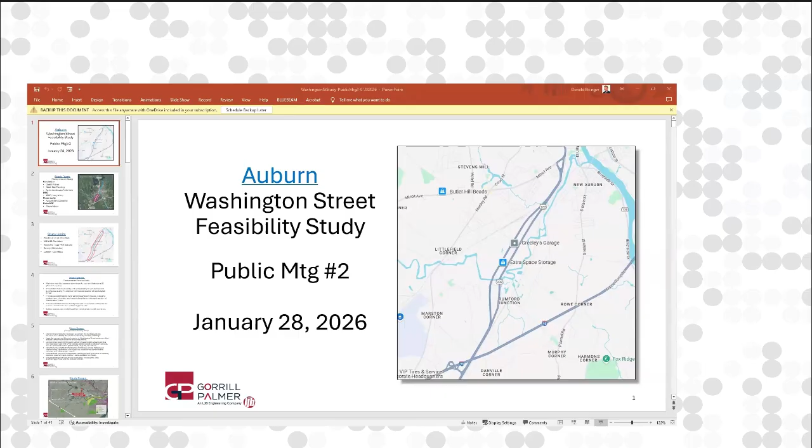See if I grab the right one. I think it's this one. Let's see what happens. All right, did I flip a page for you guys? Did you guys see it flip a page? No. I see, all right, page one. Okay, you don't see page two. Let's stop sharing. All right, let's try this again. It looked like you opened it, but maybe the slideshow didn't start. Okay, let's try this guy.

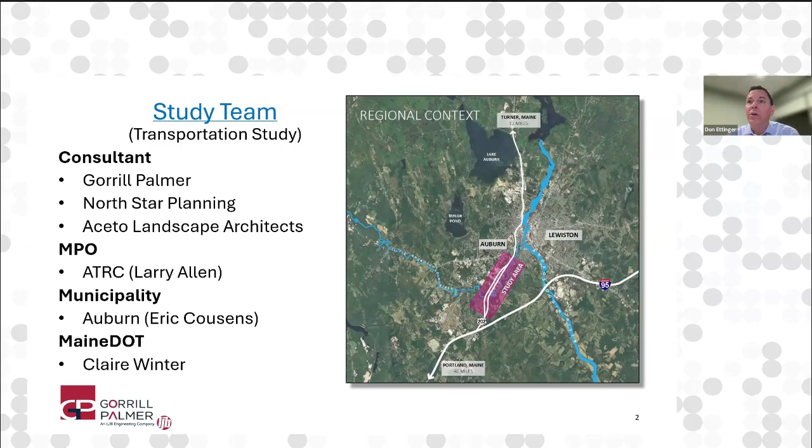All right, so first we want to discuss our study limits for this. So the graphic on the right illustrates where we are. Hopefully, Ben or Grace, can you nod your head if you see my cursor moving on the screen? Perfect, okay, thank you. So to give everybody a bearing, this is I-95, or the Maine Turnpike, here. This is exit 75 on the bottom of the graphic.

Our study begins just north of exit 75, right at Allied Road, where the park and ride is. And we continue north all the way up to the Minot Ave Rotary, where Roy's Burger is located. So we'll be continuing all the way up there. We'll be considering both the northbound and southbound barrels of Washington Street, or Route 202, through this area. And the overall length is just shy of 4 miles. So, pretty lengthy study.

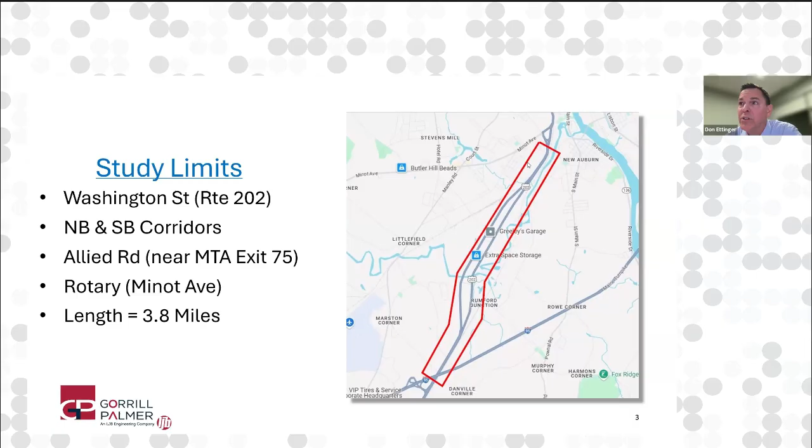What we want to do is try to provide improved safety and accessibility for properties and businesses that exist along the original northbound section of Washington Street. You'll notice driving through there, the characteristics of both the northbound and southbound barrels are drastically different. A lot of residential, industrial, and commercial businesses exist on the northbound corridor.

The southbound corridor is limited access with really no businesses along that section. Another goal of ours is to provide accommodations for all transportation modes, including bikes, pedestrians, and transit along the northbound section of Washington Street, while maintaining a limited access facility focused on vehicles and trucks on the southbound corridor. And look at safety, access, and mobility along both of those corridors.

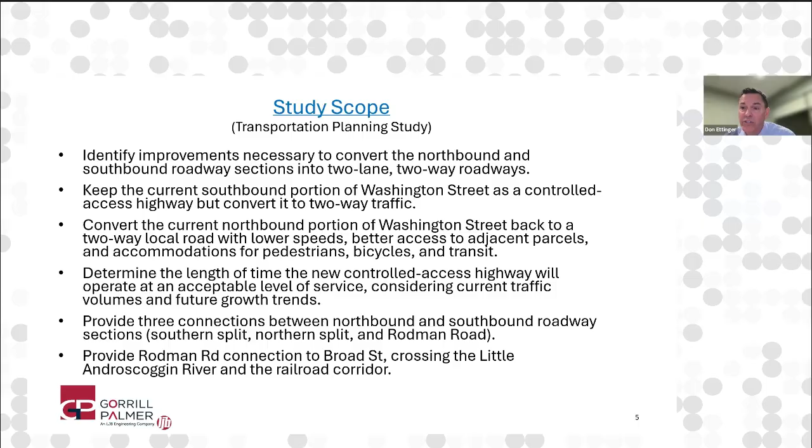I'll note on that Broad Street connection that it will require a crossing of the Little Androscoggin River, as well as an active railroad corridor in that area. So that was in narrative form what our scope is. This is more in graphical form what we're looking to do.

So in the existing condition, we have one-way traffic in the northbound direction and a separated facility for one-way traffic in the southbound direction. There is a Rodman Road connection to that southbound corridor, but not a direct connection to the northbound corridor. In the future condition, what we're looking to do is to take that northbound corridor of Washington Street and make it a local street.

Lower speeds, more accommodations for bikes and peds, make it more user-friendly for the businesses that exist along the corridor and the residential properties. And then on that southbound corridor, maintain that as our mobility corridor, but provide for two-way traffic. We maintain a connection to Rodman Road, but we'd like to introduce a new connection all the way across to Broad Street, crossing the Little Androscoggin.

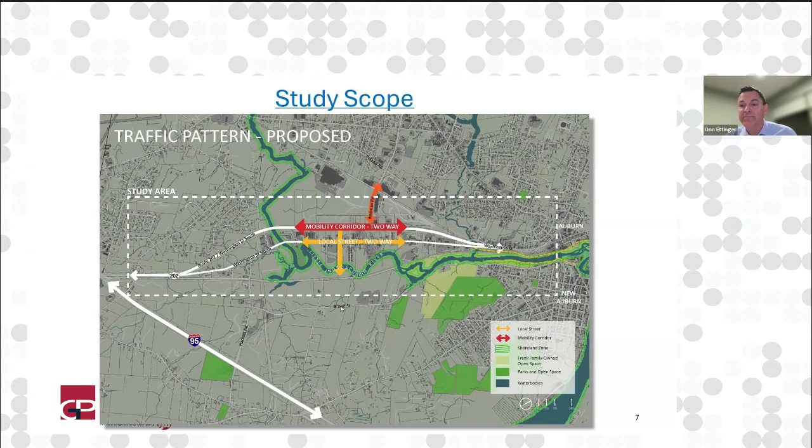Okay, so let's jump into some of the information that we gathered as we have been working on this planning study. So first thing first, roadway conditions. It's a divided highway in the existing condition. There's two lanes in each direction. It's a corridor priority 1 roadway.

DOT prioritizes roadways, I think, from 1 to 5. A 1 is the highest priority. These would be the interstate system or major arterials. Priority 5 would be a local street. So in this case here, this is a high priority corridor. It's a principal arterial. It has just shy of 20,000 cars a day, so a lot of traffic on the corridor. It has relatively high speeds through this corridor with average speed limits anywhere from 45 to 55 miles an hour.

The southbound corridor is limited access. So the photo on the bottom right here represents our southbound corridor. You'll see it's all wooded, no development exists through here. Whereas the photo on the top right shows our northbound corridor with businesses that exist along the corridor.

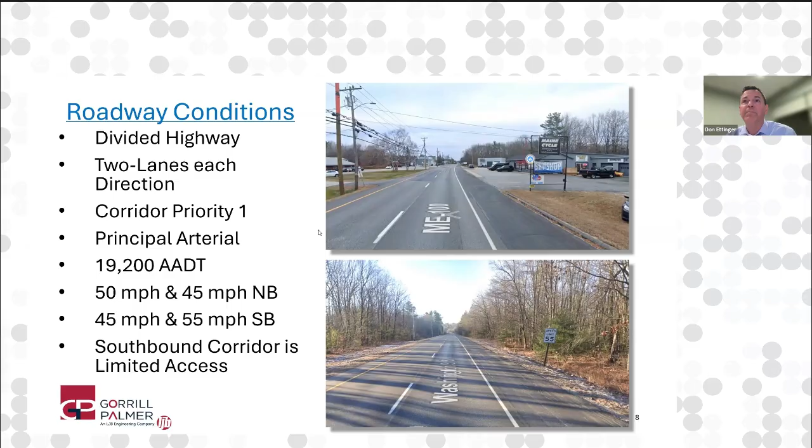All right, one aspect we like to look at in these planning studies is a safety review. Do we have any locations that are dangerous or considered high crash locations? Do we have intersections or nodes that have higher than normal crashes or accidents?

So we looked at the whole corridor, looking at high crash locations. I'll give you a definition of what high crash location means. It's having 8 or more crashes in a 3-year period and a critical rate factor of 1.0 or greater.

What is the critical rate factor? The best way I describe it is it compares the severity and types of crashes at this location to other intersections throughout the state, and then ranks them. So if it's 1.0 or higher, that will also be a trip category that needs to be met to be considered a high crash location.

So we have one location within the corridor that's a high crash location, for years 2021 through 2023, that's our 3-year period. It's the Washington Street intersection with Beech Hill and Danville Corner Road. 17 crashes in that 3-year period with a critical rate factor of 2.79.

So this intersection, there is mitigation ongoing. A traffic signal is planned and in design as we speak. So the graphics, when we present our concepts to you, will show a signalized intersection at this location.

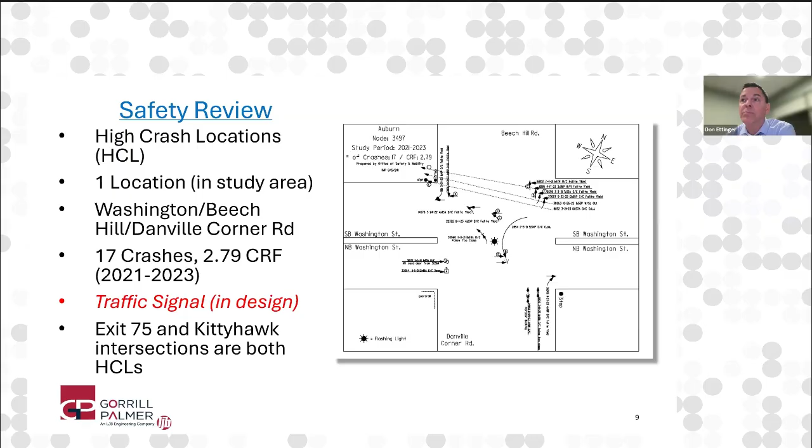They set their camera out at 5 different locations along this corridor and collected a ton of traffic data for every vehicle that crossed through this area. What we found, generally speaking, is speed of traffic is higher than the posted speed throughout the corridor. Some of it's quite a bit higher, but generally speaking, speed limits are 45 to 50 to 55, and we're finding speeds in excess of that on average for daily traffic.

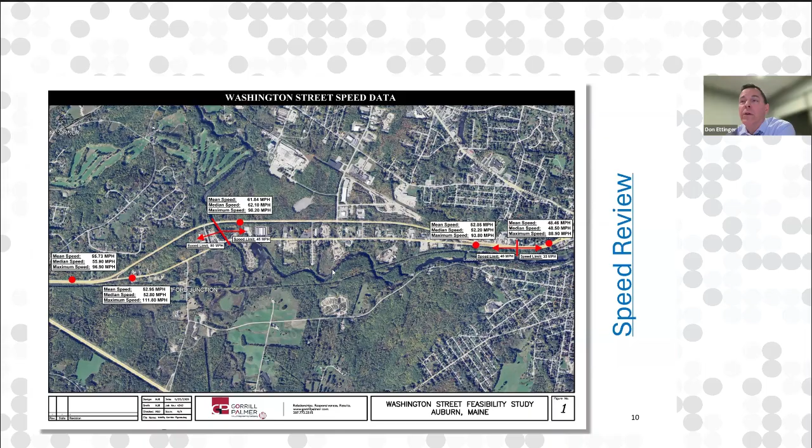All right, so we're going to transition. We talked a little bit about safety, and we're transitioning into traffic as it relates to safety. I'll start with the graphic on the right here and share with you again. We've rotated a little bit, so this is north-south for Washington Street.

So this is our Washington Street corridor. City proper for Auburn is on the top of the graphic. Maine Turnpike exit 75 is on the bottom graphic. So we have some circles here in colors, and I wanted to explain what those are.

The first one, the red circle, is the signalized intersection with exit 75, just slightly outside our study limits. The green circle you see here is the proposed signalized intersection with Danville Corner Road and Beach Hill. And then we have 3 pink circles.

This represents the 3 locations where we're providing connections between our 2 Washington Street corridors, the local street and this mobility corridor. So we call the bottom pink circle our southern split. The top one would be our northern split, or where they merge back together. And then in the middle is right at Rodman Road, where we have that connection today.

So through this area, one thing we wanted to focus in on is that mobility corridor. We wanted to understand levels of service and capacity based on different options and footprints. The other thing we wanted to determine was travel time.

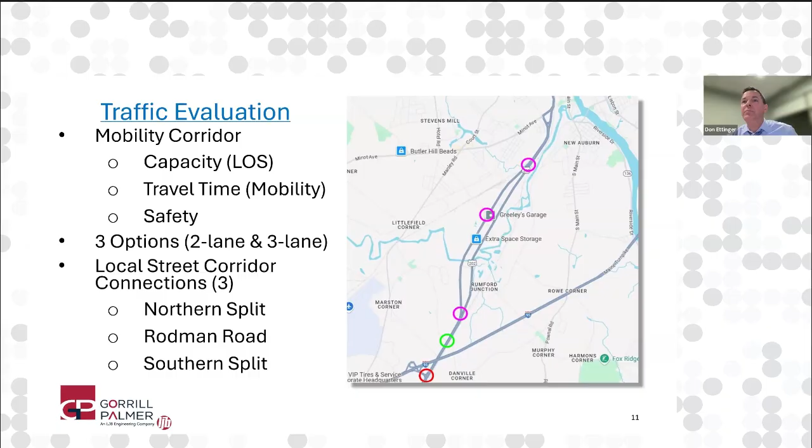So we'll jump to the results of our traffic analysis and modeling. As I've described each option, what we found was pretty good levels of service, even with a 2-lane section, 1 lane in each direction. Option 1 is just a single lane in each direction, and you'll see levels of service B, D, and B.

Those represent the 3 pink circles. Going from south to north, the southern split had a level of service B, the Rodman Road intersection had a level of service D, and the northern split had a level of service B. When we add intersection improvements, option 2, we improved our results, particularly at the Rodman Road intersection. When we added the 3-lane section, option 3, we found even better results, with levels of service B and A in the AM and PM conditions.

So what did this tell us? This told us we did not need to model a 4-lane section through this corridor, because we found a 2-lane or 3-lane section provided acceptable results. Of the 3 options, option 3, our 3-lane section, gave us the best level of service results and the lowest delays.

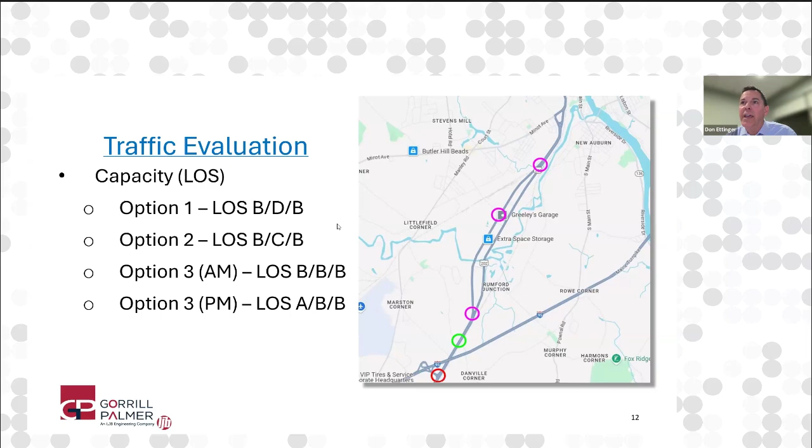So that's just one part of the big picture. The next part is mobility and travel time. We wanted to understand this because we felt it would be important for the public to hear what impacts this might have on the mobility corridor. This graphic shows we took a look at the existing condition, which is no signals and free flow through the corridor, and then modeled and analyzed options 1, 2, and 3 with the traffic signals, looking at northbound and southbound in the AM condition.

We looked at northbound and southbound in the PM condition as well. In the existing condition, to travel through our study area, which is 3 to 4 miles, it generally takes 3 to 4 minutes. When you look at options 1, 2, and 3 with the signalized intersections, we found we add about a minute of travel time, so instead of 3 to 4 minutes, it's 4 to 5 minutes.

Of the options we looked at, option 3, the 3-lane section, gave us the best results. And this was for year 2050, so this is not just opening day. We're forecasting out 25 years with growth factors in traffic volumes, as well as anticipated new development that may occur over the next 25 years in the area. So this is a future anticipation on travel time.

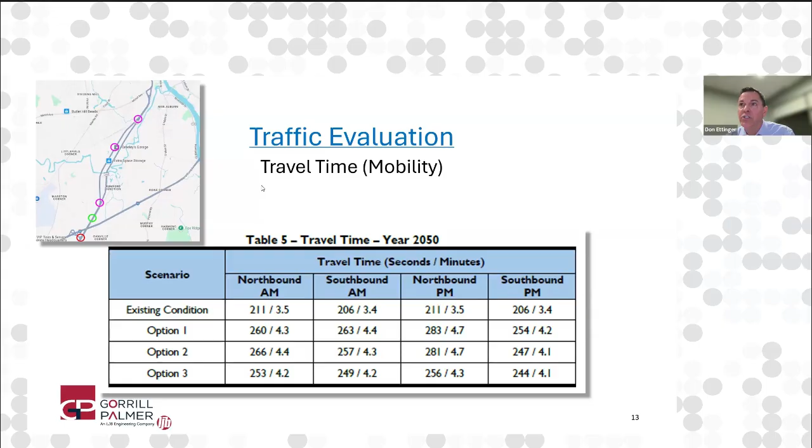The third component we wanted to look at on this mobility corridor was how to improve safety for two-way traffic and minimize head-on collisions. The graphics here illustrate our recommendation for this corridor: introduce not just a center line, but a striped center median, at least 4 feet wide, maybe 6 feet. This would separate northbound and southbound traffic. We did consider a raised or divided median, but felt the striped median was a more cost-effective solution to address the concerns.

The graphic on the left illustrates this striped center median. It shows some delineator posts, though we're not sure we'd need those on our project. It also shows rumble strips on both stripe lines, which we'd recommend as well. The idea is that a complacent driver who slightly traverses the center line would be alerted by the rumble strip, plus there's a 4-foot buffer before they'd even encroach into the opposing lane. The photo on the right is from Portland, at the Veterans Memorial Bridge, where they introduced something very similar: a striped center median with rumble strips.

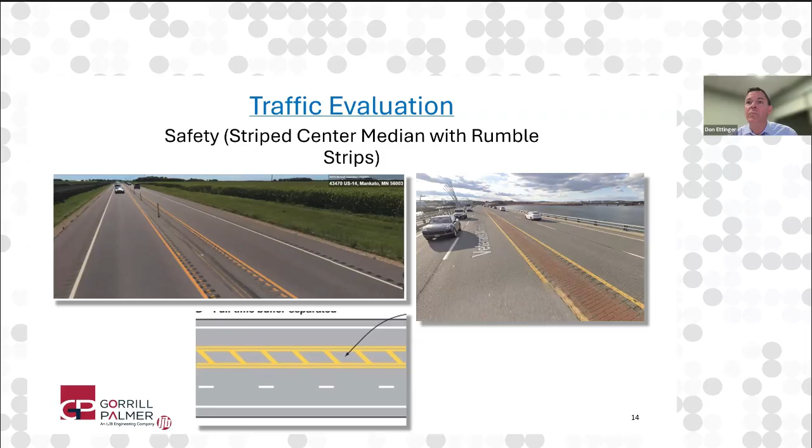Now we're going to transition to a discussion on our preliminary recommendations and concepts. We have a lot to present, and I apologize if it's lengthy and time consuming, but there's a lot here to cover.

On this graphic, north is to our right. The Maine Turnpike, Interstate 95, is located here, and Exit 75 is here where my cursor is. We're going to go from left to right on the corridor, from south to north, starting down near the Maine Turnpike and working our way northward into the city of Auburn. We have five different sections.

We'll use these terms: a southern boulevard down near the Turnpike, a northern boulevard up near the city of Auburn proper near the Minot Ave Rotary, a mobility corridor which is our higher speed facility, a local street for Washington Street, and a Rodman Road Broad Street connector that runs east and west on our corridor. With that said, we'll jump into the slides.

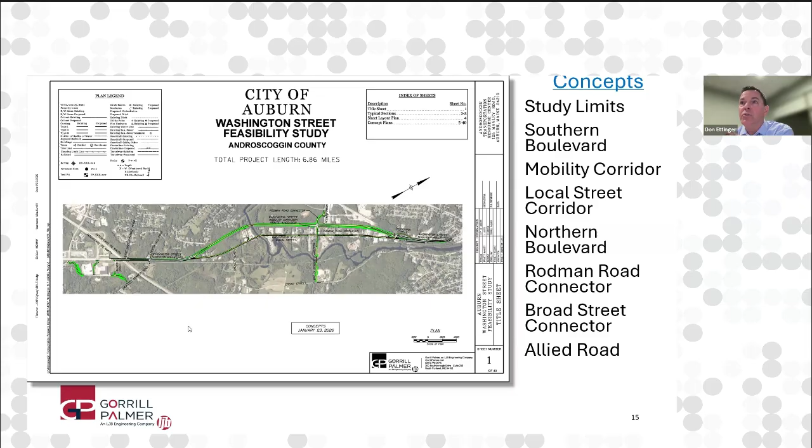At a high level, I'll discuss the preliminary recommendations for the corridor, starting from south to north. Here we're at the Southern Boulevard. This is the park and ride facility at Exit 75, and Allied Road is located here, with the next signal just off our page on the left. As you travel north, what we're proposing for the Southern Boulevard is a 4-lane section, 2 lanes northbound and 2 lanes southbound, separated by a landscaped median, not too different from what you have out there today.

But we're going to introduce bicycle and pedestrian accommodations with separated facilities. We don't want the bikes and peds interacting with the vehicles through this corridor. Anybody that drives it knows it's pretty high volume and can be high speed, so we're proposing separated facilities for bikes and pedestrians.

We'll start at the top here from the park and ride, which we see as a potential trailhead for accessing the shared use pathway. We're proposing a 10-foot shared use pathway from the park and ride running along the west side of the Washington Street corridor, continuing up to the signalized intersection with Danville Corner Road. On the east side of the graphic, we're also proposing a 10-foot wide paved shared use pathway that will continue down to Allied Road and terminate there.

We are aware that the state and the city of Portland are embarking on a Casco Bay Trail, potentially from Portland up to Danville Junction. If that's successful, there'll be about a 1 mile gap between Danville Junction and Allied Road to connect a trail system from the city of Auburn all the way to the city of Portland, which would be fantastic.

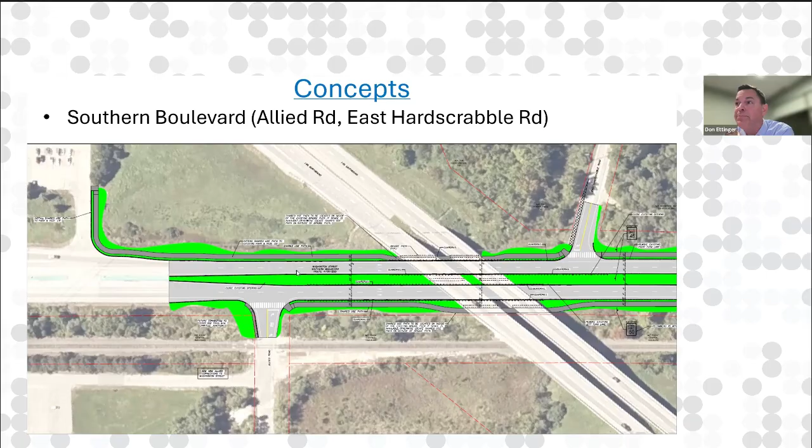All right, we're going to continue north. As we continue through the corridor, the footprint for this boulevard stays the same: two lanes northbound, two lanes southbound, a landscaped center median, curbing on both sides, with separated shared use pathways on both sides.

As we come to the Beech Hill Road intersection with Danville Corner Road, this is the high crash location. We are showing a proposed signal here, which will, I believe, be implemented as early as this summer or next summer as a construction project where they'll be signalizing that.

At this location, we're providing full pedestrian and bicycle accommodations with crosswalks, and this is where we'll terminate the shared use pathway on the west side of Washington Street. The pathway will continue on the south side, or the bottom of the page, and that will continue all the way up to the local street.

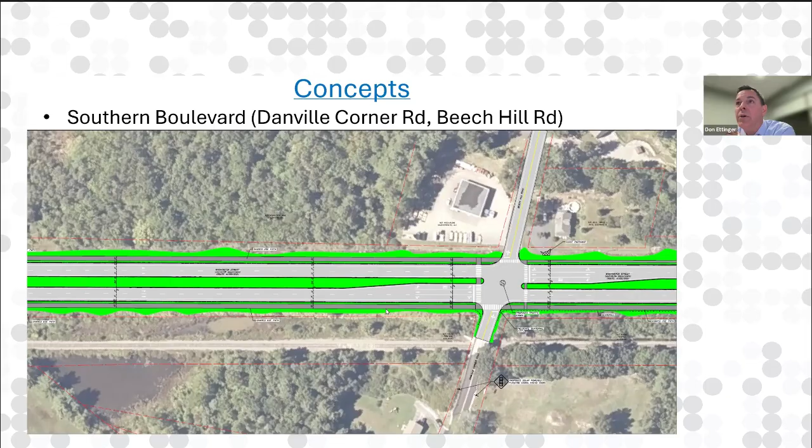All right, we're going to continue north. As we continue up the Southern Boulevard on Washington Street, we come to a signalized intersection here — this is what we call our southern split. This is where currently the northbound and southbound sections of Washington Street diverge and separate. What we're proposing is a three-way signalized intersection with the local street, which is the current northbound corridor, tying into the mobility corridor.

So the through movement will be our mobility corridor. You'll have to think about turning right or left to go into the local street. Pedestrian and bicycle accommodations will continue up to the limits of our Southern Boulevard — we'll have a crosswalk here, and then all bike and pedestrian accommodations would continue down the local street, and not on our mobility corridor heading north.

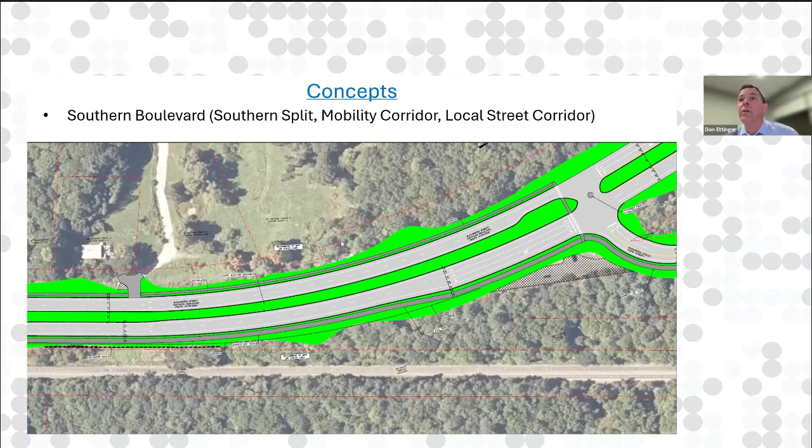All right, we're going to continue to the next slide. Actually, this is a visual of this intersection. I'm going to hand it over to Grace to talk about what we're looking at.

Thanks, Don. So as you can see, this is a perspective image taken from the point of view heading north at that southern split intersection that we were just looking at. We're in the northbound lane, and you can see the southbound lanes on the left side. Between the two lanes, we have a nice sized planted median with some street trees and planting just to break up the roadways there.

Right in the front, you can see the intersection signalized, with crosswalks going across. All the way on the right, we have another planted median that would include some other street trees as well as some pedestrian scale lighting, and then our 10-foot shared use path to accommodate both bicycle and pedestrian traffic.

Thank you, Grace. And I would build on what Grace has said — anywhere in our design where we're proposing a shared use pathway, we'll be proposing not only landscaping with an esplanade, but also that pedestrian scale lighting. So you'll see that throughout our study limits.

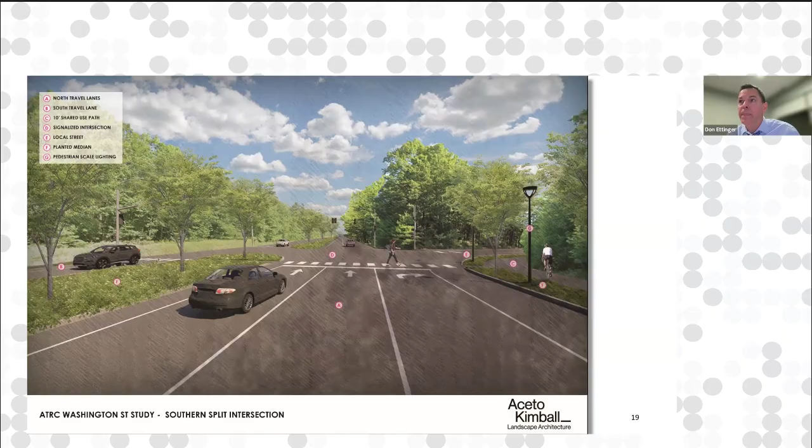Okay, so we're going to continue north. We've kind of flipped a little bit, but this is our three-way intersection that Grace just described. North is left to right on our page. So this is now our mobility corridor. And as I described earlier with our different options, option 3, which we think is the best option for moving forward with study recommendations, shows 2 lanes coming into the intersection, 2 lanes exiting the intersection in a northbound direction.

Those 2 lanes will stay there for 1,500 feet. That is probably a quarter of a mile in length. Should be plenty of time to accelerate, pass slower moving vehicles before we taper those 2 lanes into a single lane as we continue north.

And then you'll see here the yellow represents our striped median that we talked about introducing through that mobility corridor. You'll see green here at the intersections. We flared out and we have some landscape islands approaching each of those 3 signalized intersections.

As we transition down to the local street, so this is our local street here. We're proposing single lane, 11-foot lanes, 1 lane northbound, 1 lane southbound, curbing on both sides, and the shared use pathway separated as a separated facility on the east side of the corridor. And that will continue all the way across the Little Androscoggin River.

So this local street will be where we want all of our bikes and pedestrians to go. We want this to be lower speed. Our commuter traffic, we want them to stay up on this mobility corridor.

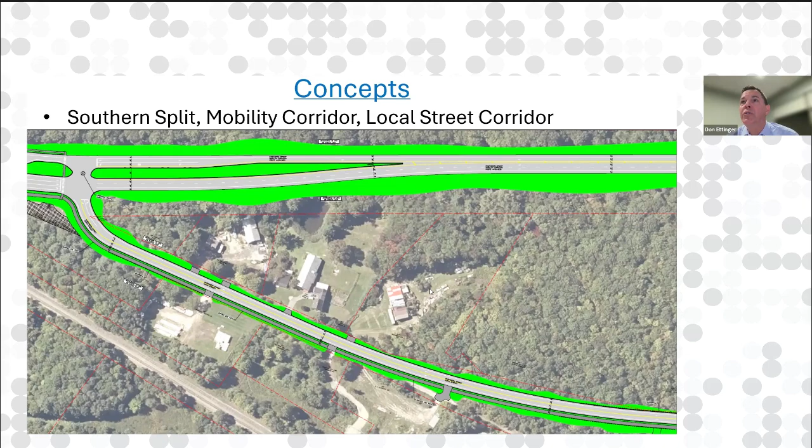All right, we'll continue further north. This is the Little Androscoggin River. There are 2 bridge crossings, one for Washington Street northbound, one for Washington Street southbound. You'll see our mobility corridor does taper from 2 lanes down to 1 in the northbound direction. We have a single lane in each direction at the bridge on our mobility corridor.

We are going to need to widen that bridge to accommodate that center striped median. There's just not enough curb to curb width on the bridge to accommodate the new footprint. So there will be some widening of that existing bridge to accommodate those needs.

I will mention Chasse Street is located here. It currently connects to the southbound corridor. One thing in the recommendations of our study will be we're going to kind of eliminate connections with that mobility corridor. So there are more than 3 connections today. We're going to limit it to just 3.

The template for the local street, which is shown on the bottom of our view, it continues with the same theme. 2 lanes, 1 lane in each direction, a 5-foot shoulder with curbing, and then we have a shared use pathway separated from the road on the bottom or the east side of the corridor.

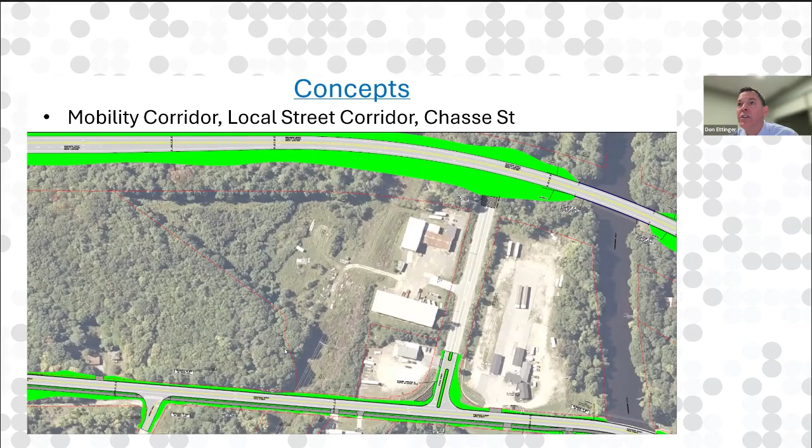If we continue further north, we cross the Little Androscoggin here. Our template for the mobility corridor is pretty consistent, 1 lane in each direction. You'll see on the right-hand side, we actually have a 3-lane section. That's because we have 2 lanes coming out of the Rodman Road intersection or traffic signal heading southbound.

We start to introduce some changes on the local street once we transition over the Little Androscoggin. So speed limits, we're thinking on the local street will probably be 35 miles an hour from that southern split to the Little Androscoggin. Once you cross over the Little Androscoggin, we transition it down to 25 miles an hour, much more of an urban setting.

And then we're going to start changing our roadway template. So once we get over the bridge, we will start introducing some crosswalks and some stronger facilities for bikes and pedestrians. So with a lower speed, and we want traffic calming through this section, we're going to introduce all crosswalks as raised crosswalks. So we'll introduce vertical traffic calming, and you'll see those are strategically placed along the corridor.

And then at our first crosswalk, we're going to eliminate the shared use path, and we're going to introduce sidewalks and bike lanes both sides of the Washington Street local street from this point heading into our kind of what I'll call our city center as it relates to the Washington Street corridor.

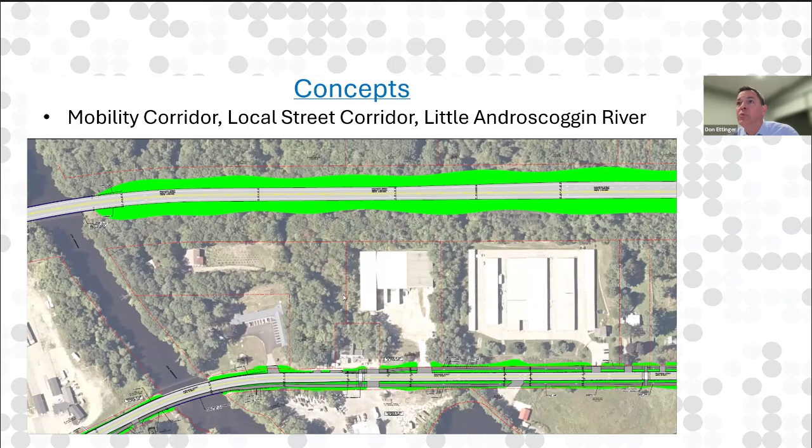So bike and pedestrian facilities, both sides of the street, curbing, 11-foot travel lanes, narrow shoulders, I think maybe 3-foot shoulders, and then a wide esplanade. The esplanade is wide enough that we can accommodate future on-street parking as development occurs through the corridor. As we continue north, we get to what I'll call our city center area for the local street.

This would be our hub for land use development, future land use development, or redevelopment. You'll see on the top of the page, we have our mobility corridor connecting to a Rodman Road intersection that will be signalized, with multiple lanes traveling through to make sure commuter traffic gets through in efficient time.

On the local street, we have a similar template to the prior slide. Up to about 2 blocks from our city center, we'll introduce on-street parking, with sidewalks on both sides and bike lanes likely up with the sidewalk. Grace has visuals to share of the 2 options we're looking at. We'll have curb extensions at each crosswalk with vertical raised crosswalks to introduce traffic calming through the corridor.

When we get to the urban center, this will be a new intersection with the local street and a Rodman connector. We're proposing an all-way stop here, so all traffic on all approaches will have a stop condition. Continuing down, there's a connection between the mobility street and the local street, which we'll talk about in some slides later in the presentation.

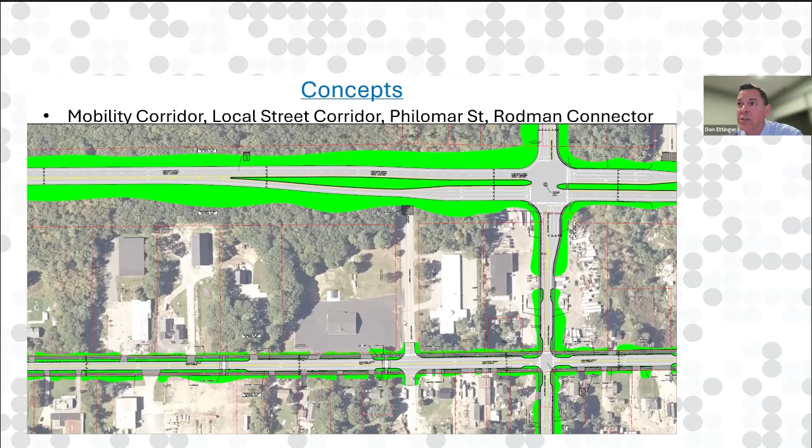My next slide will transition to some visuals that Grace can discuss as it relates to the local street. So, Grace, I'll give it to you.

Thank you. As Don said, we have 2 different versions we're looking at for applying the bike lane and sidewalks on this local street in this downtown city center, town center area. This is version A, where the most notable difference is that the sidewalk and the bike lane are separated by a planted median.

Again, you can see our pedestrian scale lighting, medians with street trees. This option doesn't allow the larger street trees you might see in a town center setting, due to the proximity of the buildings and the closeness to the travel lanes.

And you can see further down that these more interior medians become the street parking further down. Then we've got our 2 travel lanes, and in the center there's a raised crosswalk.

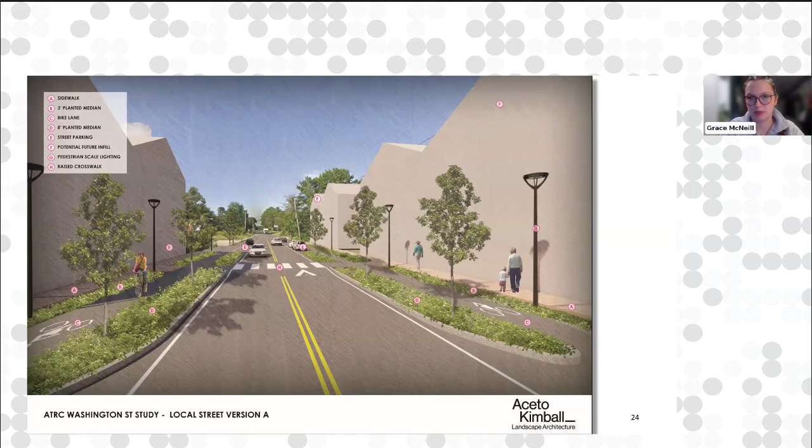The next graphic will break up the view a little bit so you can see the differences better. On the left, our future infill. I want to say the reason you're seeing those amorphous white buildings along the edge is because in this study we talk about what we call a complete street, which includes infill—great to see in this area. Ben will talk later about what that might look like, but we're including them in these graphics so you get an idea of what this street would look like when totally finished and functioning as a complete street.

This section breaks up the orientation of the street a little better to see. Starting on the left with our potential future infill buildings, we've got a 6-foot sidewalk, a 3-foot planted median that includes that pedestrian scale lighting, a 5-foot bike lane also raised at the same level as the sidewalk, and an 8-foot median—further down this also includes street parking in that same area. Then our 6-inch curb, 11-foot travel lanes, and the same thing on the other side of the street. That's version A.

This is version B, where the biggest difference is that the bike lane and the sidewalk are together on the same plane. There are many different ways to delineate the lanes of travel between the bike lane and sidewalk—we've chosen to do it with a material change, with the sidewalk as a brick paving material and the bike lane as asphalt, same as the street. It can be as simple as painting symbols on the ground plane. There are lots of different ways to make that happen.

Another difference here is we've got one larger planted median, which allows for larger street trees in this option. Again, in that same median, we continue with the pedestrian scale lighting that would help both the bike lane and sidewalk area. And again, we're showing these potential future buildings here.

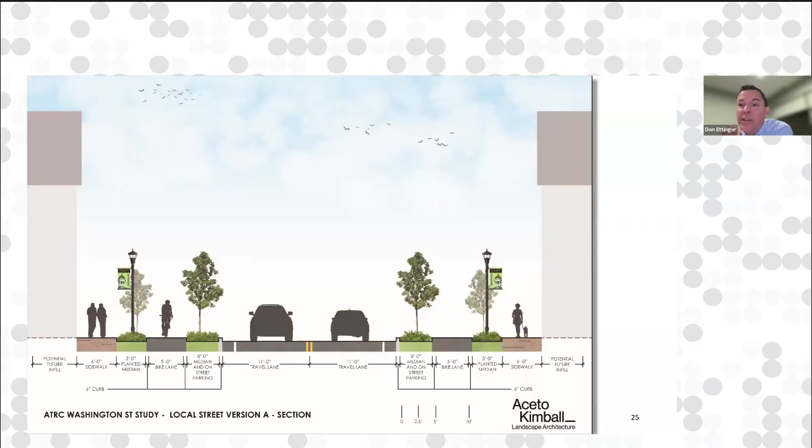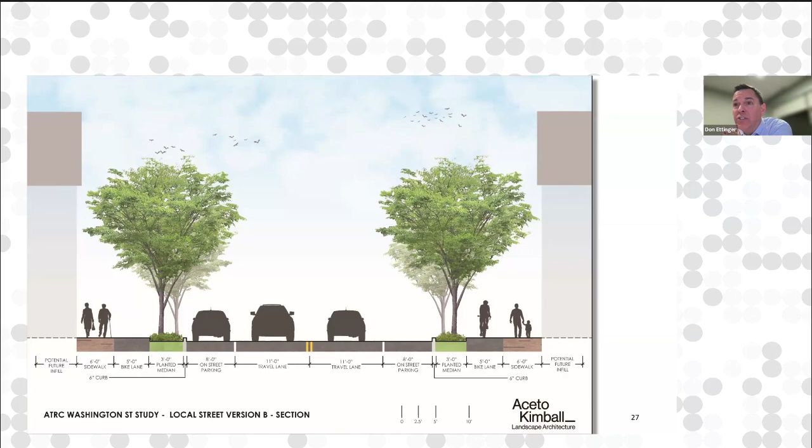Thank you, Grace. So our earlier concepts, as we developed them, were showing concept or version A, something like this. The graphics we're presenting tonight, we flipped it and we're starting to show version B. So we still need to do an evaluation between the two options, advantages and disadvantages, before making a final recommendation on which one to proceed with.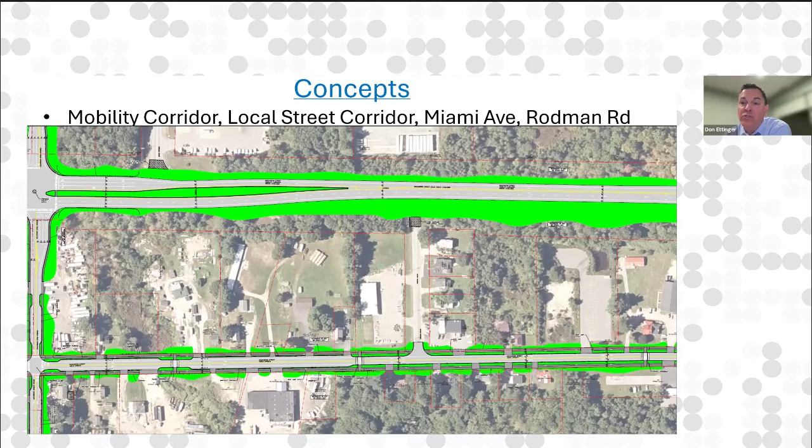The local street corridor has a similar mirrored theme, where for the first 2 blocks we provide on-street parking. We have crosswalks, raised crosswalks with curb extensions, and bike and pedestrian separated shared facilities on either side of the street. Once we get past the first 2 blocks, we eliminate the on-street parking and introduce a wider esplanade. The intent is to design the template so that if future development occurs through the corridor, there's the opportunity with minimal cost to remove the esplanade and introduce on-street parking.

All right, we'll continue north. As we continue north, our next intersection is the northern split. This is where the connection where the northbound and southbound barrels of Washington Street reconnect. It's also where Brickyard Circle is. The mobility corridor is a similar theme: we mentioned 2 lanes southbound coming out of the signal, and you end up having 1 lane coming in northbound into the intersection.

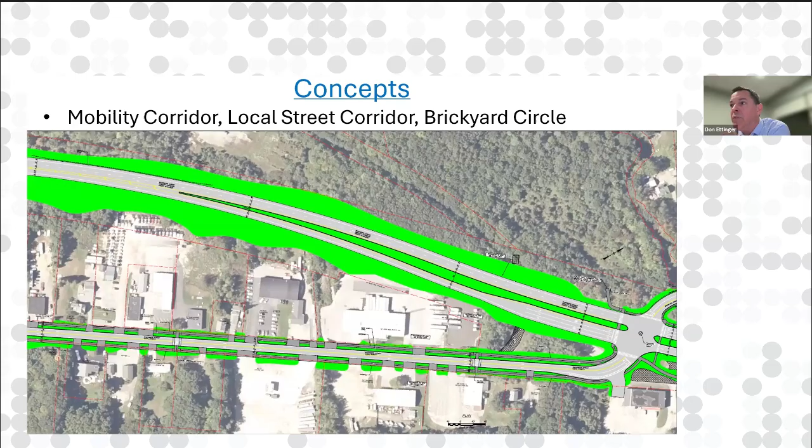The template for the local street is similar to what we just discussed: 1 travel lane in each direction, curbing, wide esplanades, and separate bike and pedestrian facilities on both sides of the street, with raised crosswalks strategically placed for traffic calming. As we get to the intersection with Brickyard Circle, we're proposing our 3rd connection here, a signalized intersection between that mobility and that local street. We're providing full pedestrian and bicycle accommodations around the perimeter, and trail connections, which we'll talk about in the next slide.

So the next slide here, this is Brickyard Circle today. This is our Washington Street corridor. This is what we're calling our Northern Boulevard, where both the mobility and the local street are now merging. We're proposing 2 lanes in each direction, similar to existing conditions, separated by a landscape median. We provide turn lane pockets and crossings, mid-block crosswalks with rapid flashing beacons and refuge islands, and sidewalk on the west side through the corridor, as well as a shared use pathway on the east or south side of the corridor.

You'll see there's a trail shown here, Taylor Brook Trail. I believe this will be under design with the city. It's been approved to build a trail on an existing rail corridor. We'll tie that into this transportation infrastructure, extend it down and have it cross Washington Street, and it could extend to the residential neighborhoods to the west.

We are proposing connections on both sides of Brickyard Circle. This will be right-in, right-out on the northern connection. The benefit of this is for the businesses that exist here, even though they won't be able to turn left like they can today. They can't today either—they need to use Brickyard Circle to do a U-turn. So they'll use Brickyard Circle and then the signalized intersection to turn around and head back into the city.

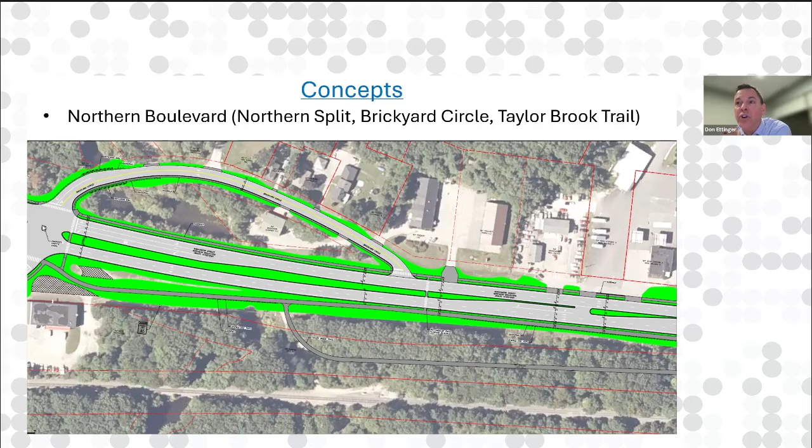All right, we're going to continue north here. Continues with our Northern Boulevard, similar footprint, shared use pathway on the east side, sidewalk on the west side, separated facilities for bikes and pedestrians. And then we terminate someplace here at a point close to the Minot Ave Rotary.

There is a separate planning study ongoing with the City of Auburn for Minot Ave, including the Rotary itself. It's actually the same consultant team working on that one, so we'll be working both studies to come up with a footprint that works for both, referencing each study as we can complete it. This study we're hoping to wrap up sooner than the Minot Ave study, which is just getting started. We're hoping to have our first public meeting maybe in February.

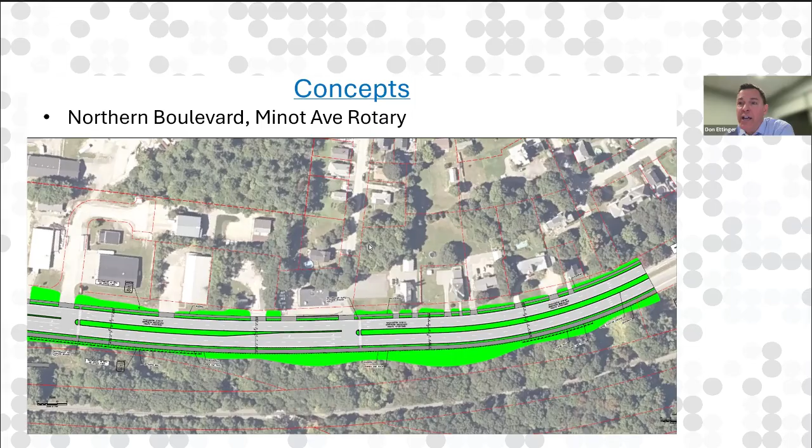All right, a few more slides here to present. We'll stop right here. So this is our Northern Boulevard footprint. Grace, do you want to just describe what we're looking at?

Sure. So it should be pretty familiar from what we looked at in the other Northern Boulevard perspective image. Again, we're in the northbound lane here, with the southbound lane on the left side. We're showing planted medians. The planted median closest to us, next to that white vehicle, is narrower to accommodate that left turning lane into that business over there. But further down the road, it widens up again and allows for street trees like we saw on the other perspective. On the right side, we've got our median again with street trees, pedestrian scale lighting, and a 10-foot shared use pathway for bikers and pedestrians.

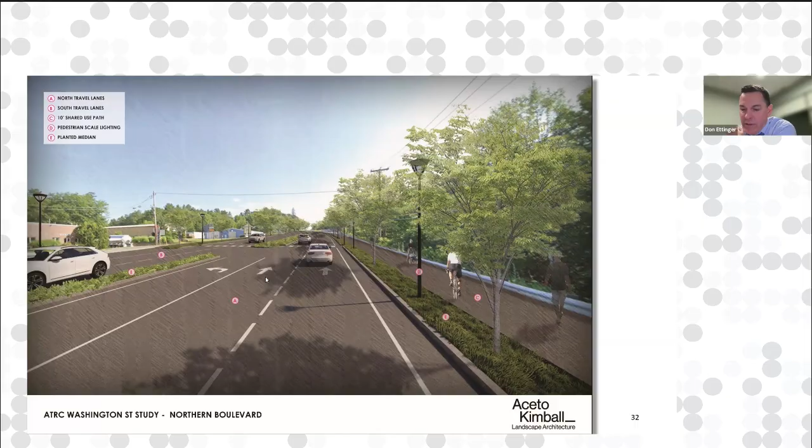Awesome. Thank you, Grace. All right, we're now going to transition. We got a few more slides here. We're going to transition to our east-west connection, Rodman Road to Broad Street connection.

So this is Rodman Road here today. It connects to Washington Street. So we've flipped our views, north is up on this graphic. This is our mobility corridor here where my cursor is, and this would be our local street corridor here. So Rodman Road, we're proposing to realign a portion of it and tie it into Washington Street with two intersections. One with the mobility corridor.

This will be a signalized intersection. A lot of truck traffic here, heavily used, particularly this right turn movement coming off of Rodman to go south towards the turnpike. So full access here, proposing a sidewalk on the north side of Rodman Road, shoulders for bikes through here. As we continue across the signalized intersection, we have a connector here. This would be a brand new road facility connecting to the local street, all-way stop at the local street, providing for sidewalks on both sides and bike accommodations.

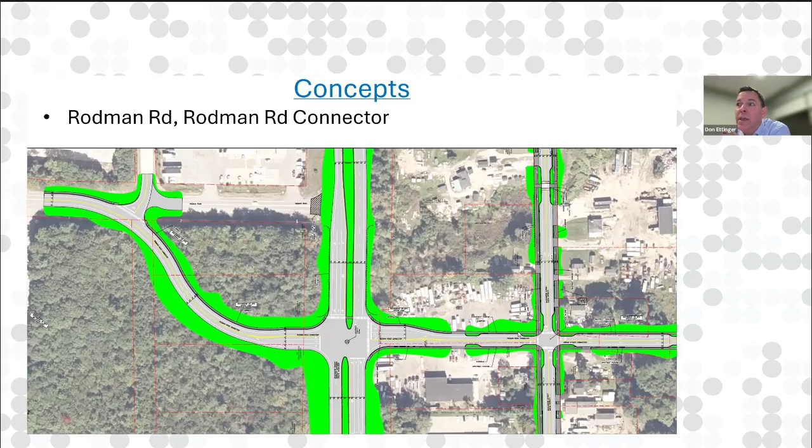And then we'll continue east, and we'll be crossing and connecting into Broad Street. We'll be crossing the Little Androscoggin, so that will be our next slide. This is continuing east. We have a crossing here with the Little Androscoggin and a straight shot over here to Broad Street. So first the crossing.

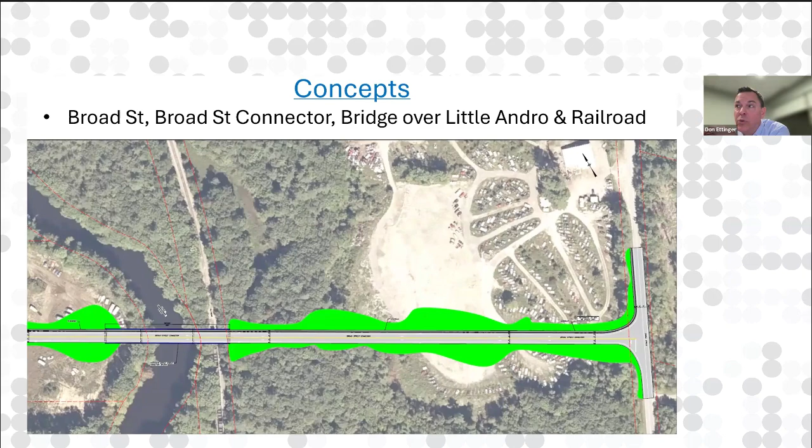So here's the Little Androscoggin, and here is an active rail line. We'd be proposing a bridge where those two are very close to each other, so we could span both facilities with one bridge, likely a 3-span bridge through this area to span not only the river but the railroad tracks. Our roadway template would be 11-foot lanes, 1 lane in each direction, 5-foot shoulders for bikes, and a sidewalk with curbing on the north side of this facility.

My last graphic on the concepts is coming full circle back to exit 75. So this is the main turnpike here with exit 75. This is Allied Road, and these are the businesses that exist on Allied Road. We talked about restricting left turn movements here in our previous slides. So if we're going to do that, how are we allowing for vehicles and trucks to access these businesses and turn left? We actually show 3 different options here.

Option 1 would be to provide basically a new Allied Road connector or a driveway that would be opposite exit 75. Exit 75 is a 3-lane, or a 3-leg signalized intersection. We would introduce a 4th leg to that signalized intersection, so truck traffic coming off the turnpike could run straight across to get access to these businesses.

Trucks leaving these businesses could go straight across to the turnpike. Seems pretty basic, but there is an at-grade railroad crossing that would be required here, as well as an existing at-grade railroad crossing on the Allied Road corridor.

Our second option would be to extend Allied Road to the south and have it tie into Station Road, which gives access to a signalized intersection on Washington Street where Kitty Hawk Ave is located. So that's our second option.

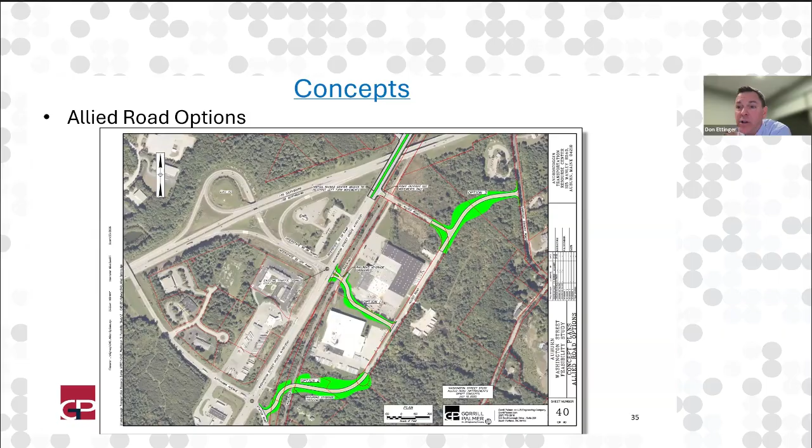That covers a lot of our preliminary recommendations and concepts. I'd like to transition to discussing the softer side of this design, the non-transportation side — more land use planning, looking at future development, future zoning, and how that might be influenced by the transportation infrastructure we've discussed.

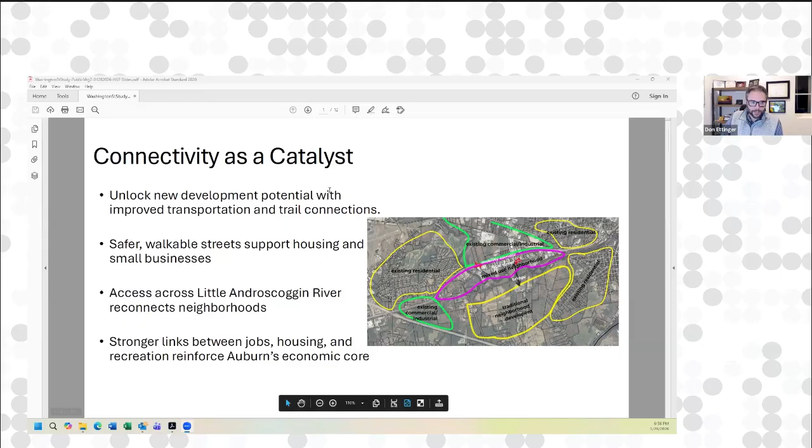What we're hoping to show here is a bit more about how zoning updates — which include what happens on a property, what's allowed and how — along with additional zoning changes around design standards and the form of new development.

This relates to the types of things people consider in the location of buildings on a site, the materials used in the buildings, landscaping, lighting, and giving those elements more priority in the design process.

Those two together are really what we think of as the 3 Ds of development: diversity of land uses, density of uses, and design. All three of those variables are envisioned for significant change on the local Washington side of the study area. To make that happen, additional infrastructure work and planning needs to take place.

As well as thinking more about placemaking and open space — a critical component in helping turn this from a drive-through, get-through-as-fast-as-you-can corridor into a new neighborhood on local Washington Street, a place where people want to spend time, spend money, live and work. Next, please.

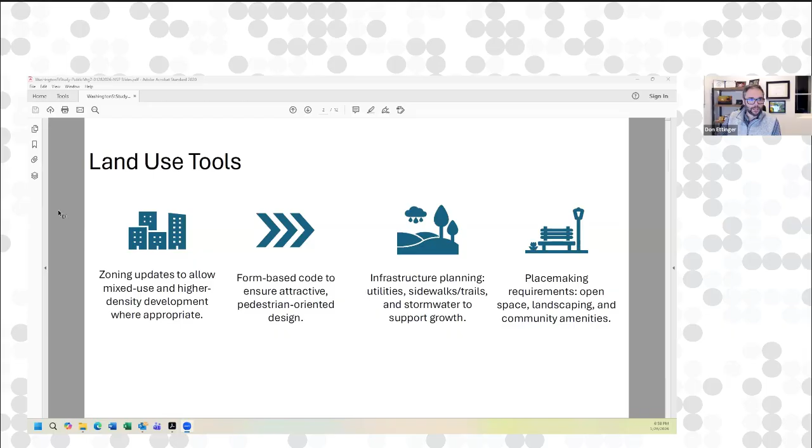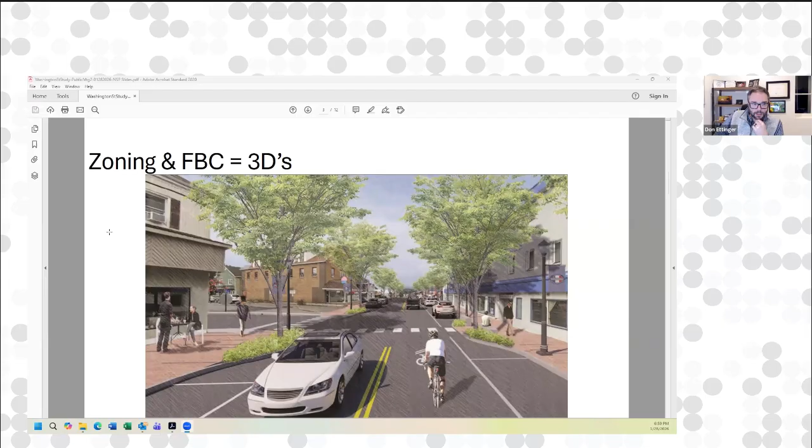So we started by thinking a little bit about what is happening in the vicinity of this study area. The study area is that purple blob in the middle, but there's a lot happening around it. There's a lot of activity and business in the corridor, existing neighborhoods surrounding it, and a lot of industrial and commercial uses. There are important connections to the intermodal facility and the airport. This is the primary lifeline connection between the interstate and the downtown area, so we need to think about all of these things in the context of looking at changes to Washington Street.

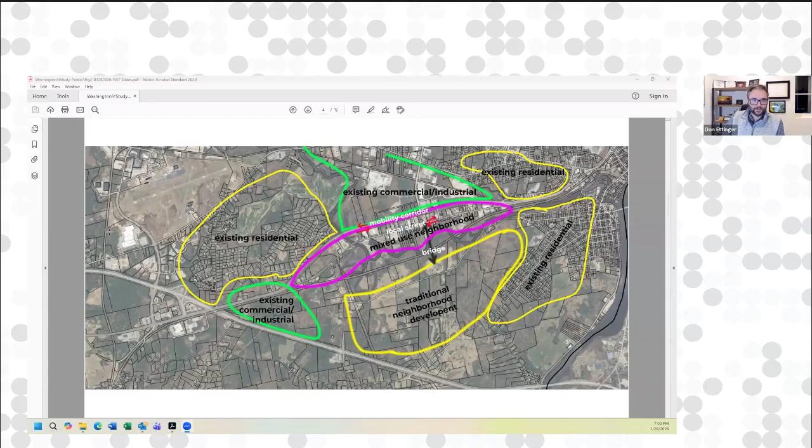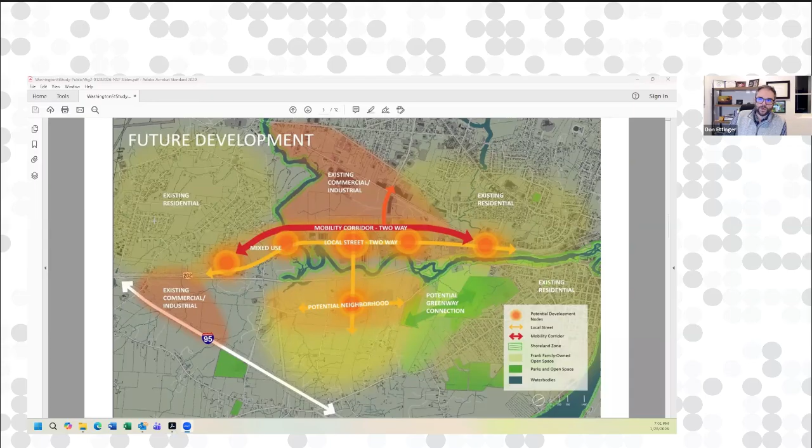Don, maybe go to the next slide. We started to conceptualize this project as reimagining Washington Street, and the idea we put forward on the project website is that this is really the Little Androscoggin district, and it's going to have a new identity. It's going to be focused on the river and on local uses, not just that drive-through area. So when we talk about the 3Ds and a place that people want to be, this is a little more detail on what we're talking about.

What we're thinking is redevelopment of underutilized sites. There's a lot of pavement on many of these sites associated with industrial, trucking, and distribution uses. Those are great uses, and they have a home in Auburn, and they will for a long time. But over time, as folks think about other options for their property, they'll have options that include more than just what's there today.

That's going to include places to live, and you can start to see that happening around the project at the northern split. There's been a lot of development already approved around this area, but we're thinking about how to integrate that with public spaces, particularly the trails and the multimodal path. I'll talk more about that in a moment. So next, please.

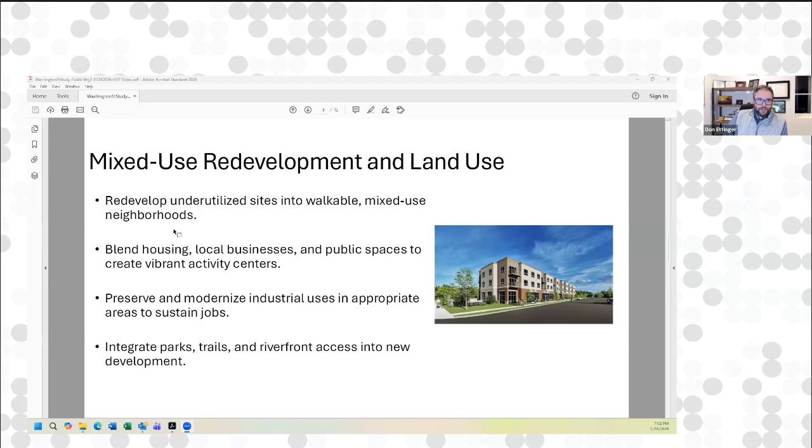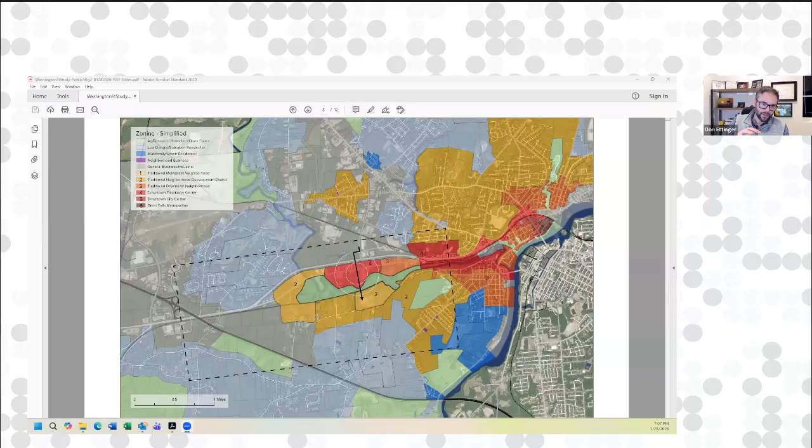So the idea here is that there really is a missing link, just like there's a missing neighborhood almost. There's a missing connection here that I think this project can help tie together the city and the exit 75 area.

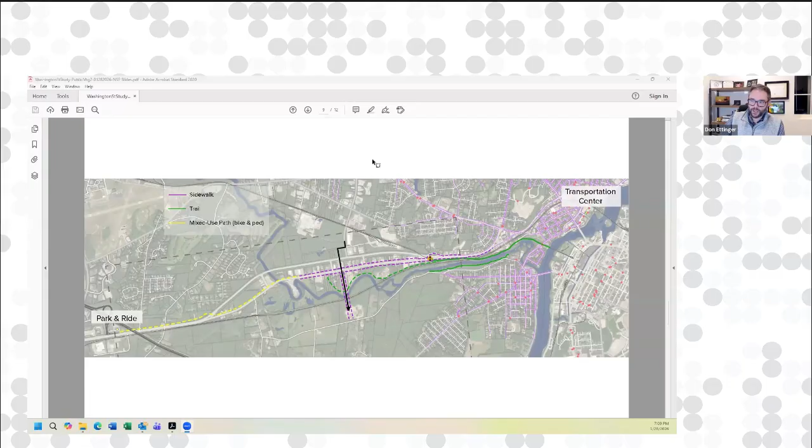The regional transportation planning folks are important partners. There's also a very strong conservation ethic in Auburn, and that's come through in the committee work around these trails. Bike and ped advocates are important partners as well. By reaching out and expanding the network of people involved, this isn't going to be just a DOT project or a public works project—it's a city project. That kind of network and mindset can help make things happen, not only from a money and financing standpoint, but also policy, zoning, and community support.